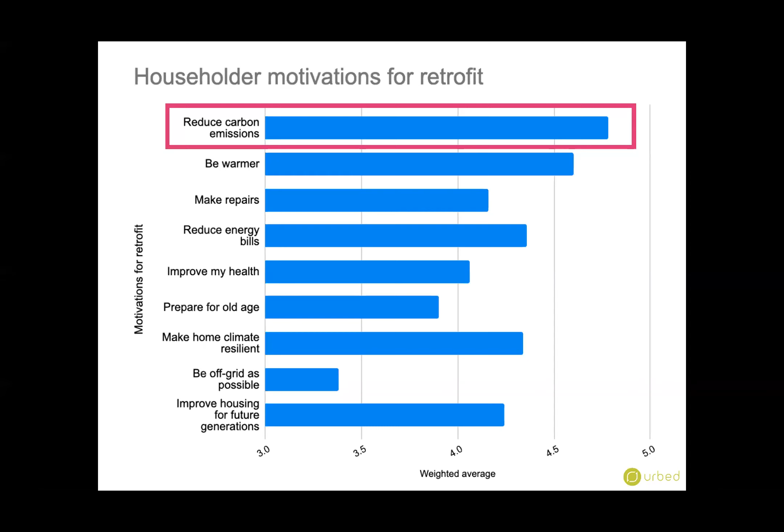Though not all, and it is alongside other things that are important, like comfort and reducing energy bills. But the reason that we're bothered about carbon is because it has a real physical impact on the climate that we are all trying to live in.

If you haven't got your warming stripes yet, there's the web link available there. It's quite a fun thing to do, but obviously the last few years especially, things have been getting a lot warmer, and what we're trying to do is mitigate and reduce the amount of warming that we're going to end up with this century. The main way that we're talking about doing it here is by reducing the carbon emissions from our homes.

There are a lot of different terms that get bandied about. People talk about zero carbon, or even being carbon positive, which is quite ambitious. At the moment, we live in a world in which a lot of the systems we have to deal with, the economic systems, the energy systems, the processes that go into making stuff, all carry some kind of carbon cost. It can be quite confusing how that gets accounted for and where you draw the boundaries, which is something that I think both John and Julie and Lois are all going to talk about.

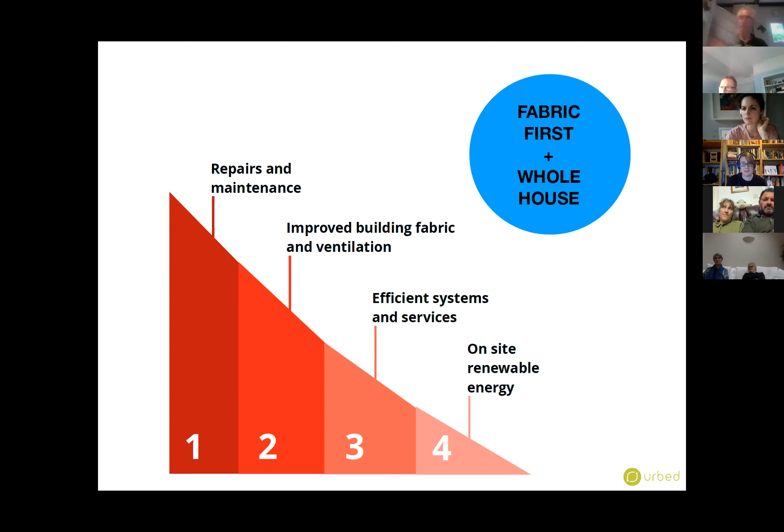That means that we don't always all end up with something approaching passive house, though it might be a step along the way there. When we did the Community Green Deal, the actual design work for it, a lot of it was done in 2013, so this is quite a long time ago now.

And we talked about the target, that being 17 kilograms of CO2 per metre square per year. That came from something that was even a couple of years before that, the Retrofit for the Future programme, because at the time that was what people were saying that we needed to get to achieve that 2050 decarbonisation.

That is kind of tricky, and what we've realised is that counting and targeting carbon in our homes is quite difficult, because we're living in a changing energy system, and that's something John will talk about in a bit more detail in a moment. We've always looked at space heating demand, because that, for most houses, is the biggest use of energy.

And it's also the thing that has an impact on those other things like comfort and health. We're interested in where that should end up and where we need to be to achieve that actual real life zero carbon outcomes, because we talk about it in things like My Home Energy Planner, and when we're doing our strategizing for where we need to get to.

Marianne, do you just want to unpack the concept of space heating demand a little bit? Because it's a term used quite a lot, isn't it?

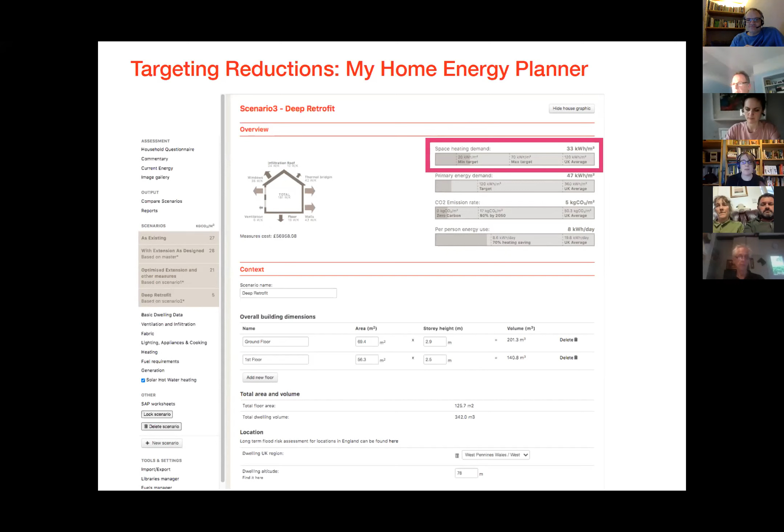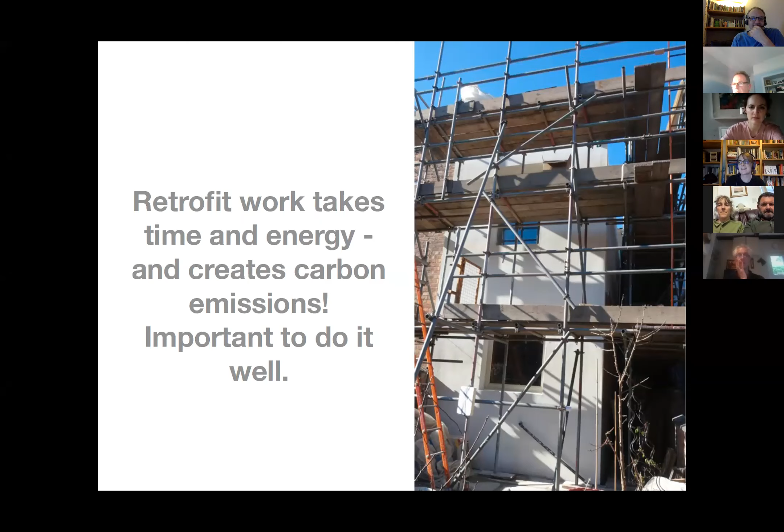The other thing we're really aware of is that you could do a lot of work to retrofit your home, but in doing that work, there's also an energy and carbon penalty. So we want to make sure that when we do that work, we do it well, do it properly, to the level required so it's not wasted. Lois is going to talk more about that side of things and where the balance might sit. And it can get a little bit complicated.

Especially over the last few years, because Carbon Co-op have developed their energy services team, we've always kept in mind that Carbon Co-op has always been a cooperative effort. It's about a group of people doing stuff - you're not just an individual doing things to your home, it's part of a wider effort. Your home is also part of a wider energy system, and how what you do in your home, and what lots of other people do in their homes, impacts that wider energy system.

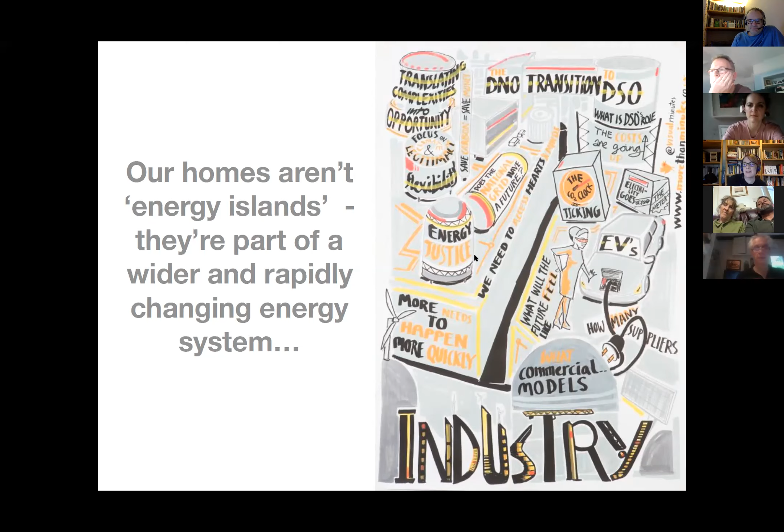And that energy system itself is changing really rapidly. We've got a massively rapidly decarbonising grid. When I started out in this, the no-brainer thing to do was put in a really efficient gas boiler and put PVs on the roof, because the amount of carbon emitted for every kilowatt hour of grid electricity was at least twice what it is now. That has changed, especially over the last couple of years. So that changing context changes maybe what we should think about doing.

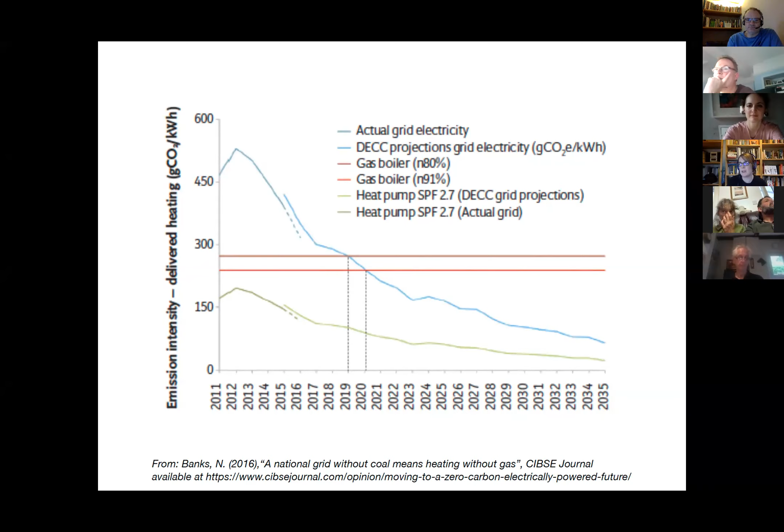So this is how we're trying to think of things: we know we need housing that has lower energy demand, and we know the energy system more widely is hopefully decarbonising even more rapidly over the next decade or so, but eventually hopefully will be zero carbon. You're not actually going to get zero carbon homes until those two things come together, and we need to think of the two things in tandem as well.

So it's what you're doing in your home that has system effects, and then from those system effects, what the target should be for your home. And it gets quite messy.

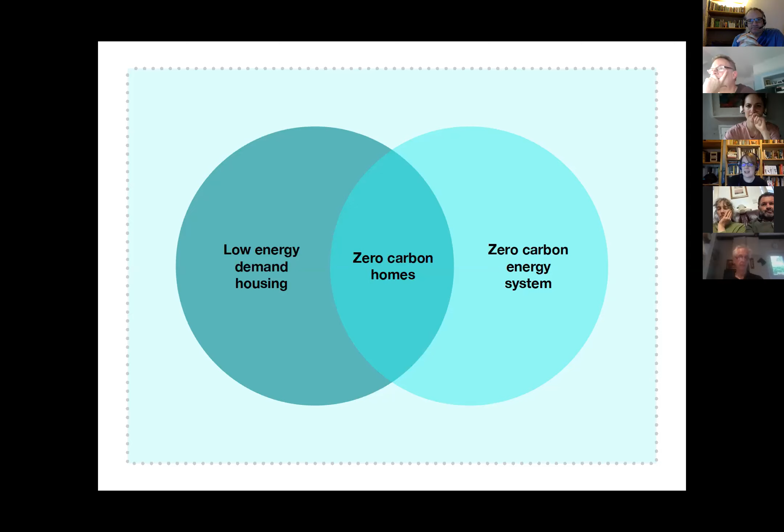That's why we're talking about this, because at the moment we don't live in a set of systems that are zero carbon, and the only way you can potentially get to something like net zero at the moment is probably by offsetting in some way, which has lots of interesting accountancy that can be done around it. But that's why we're talking about what is 'zero carbon ready' - what can you do now in anticipation of wider things around you changing, and what might that mean?

I think the next three presentations are going to go into some of the issues around that in more detail. So that's it from me.

Thanks, Marianne. That's really good, and it's a really good way to set up the debate and discussion there. Because the house is a point of nexus where you have all these different things coming in from different areas - the decarbonisation of the grid, but also the demand on individual houses and reducing that as much as possible.

We're going to hear from Julie now, Julie Godfrey, who works at CIBSE and is also an independent environmental consultant. Julie, John and Lois will pick up different elements of what Marianne's introduced and unpacked. Julie's going to be talking in particular about why heat matters and fabric performance.

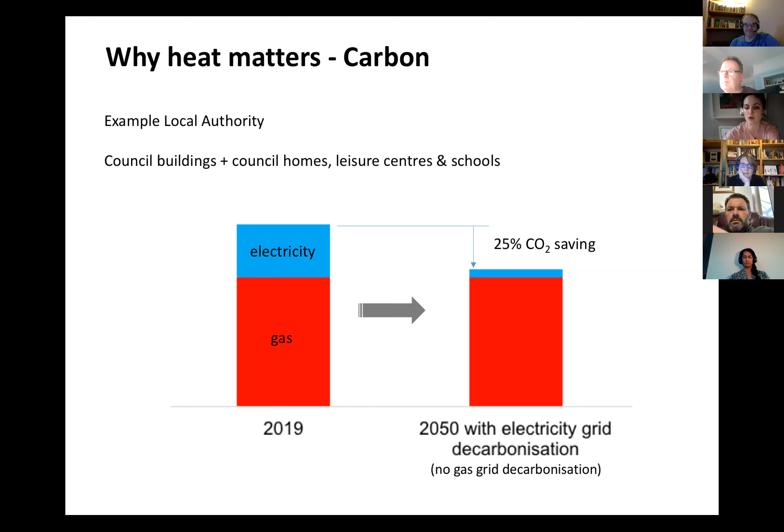So if we just switch from gas to electricity without reducing our demand, we would have problems at the national and/or local level in meeting actual demand. It's not only about how much we consume during the year, but what we need on that one cold winter day.

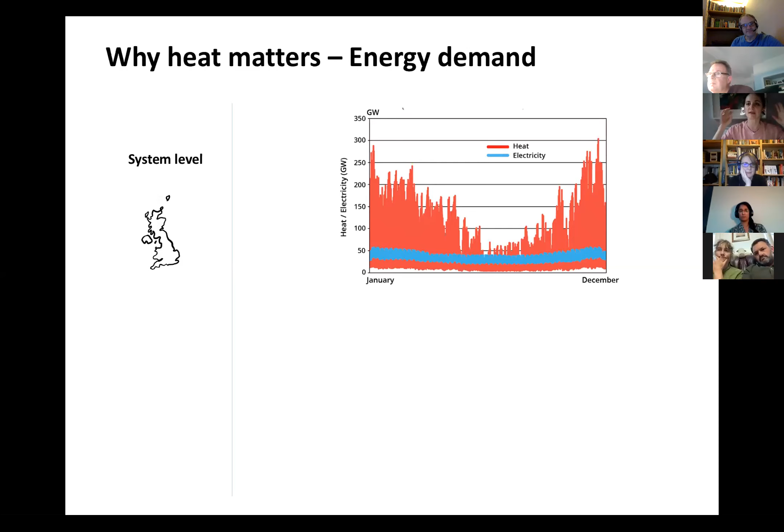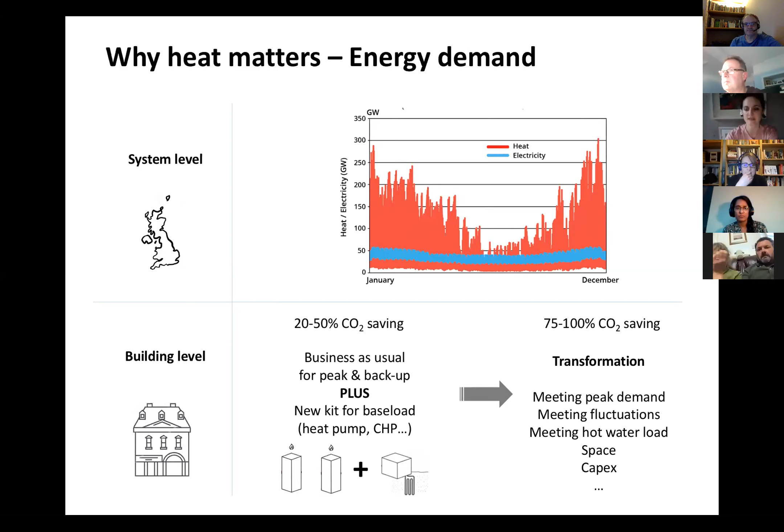At the building level, for us as homeowners, it's also pretty important because we could have a boiler or another piece of kit that meets our demand most of the time, but the size we'd need to keep us warm on that cold day is much higher. A boiler doesn't take much more space and isn't much more expensive for that. But when we look at alternative technologies like heat pumps, they may take much more space and cost much more when we buy them. So it's really important to try to reduce this massive demand for a few days in the year, as much as how much we consume throughout.

A question we often get asked is, with climate change, will heating still matter? The answer is yes. Currently, deaths from heat waves make the headlines, but they're actually much lower, even in a bad heat wave, than excess winter deaths. Now, excess winter deaths also include deaths from flu, so it's difficult to precisely allocate what's due to cold, but it's usually estimated at around 10 or 11,000 a year in England and Wales, which is way higher than even the worst heat wave we've had in England.

The other thing happening is that we're becoming better at managing heat waves - we have warning systems in place, we make sure people aren't alone, have had water, etc. While people in fuel poverty in cold homes really have an issue. Even accounting for climate change, UCL and the Committee on Climate Change estimate that even in the 2080s, yes there will be fewer deaths related to cold, but they would still dwarf those related to heat. So heating will still matter in the UK.

The other thing we often hear is, can retrofit deliver? There's loads of horror stories about what can go wrong - for example, mold, poor ventilation, condensation related to thermal bridging, overheating, deterioration of insulation, and what's called the rebound effect, where you don't actually get energy savings because people put more heating on. Yes, that can happen, but that's why it's important to do retrofit properly, as Marianne said, adopting a whole house approach and sharing lessons as we learn about that type of insulation or setup being dangerous.

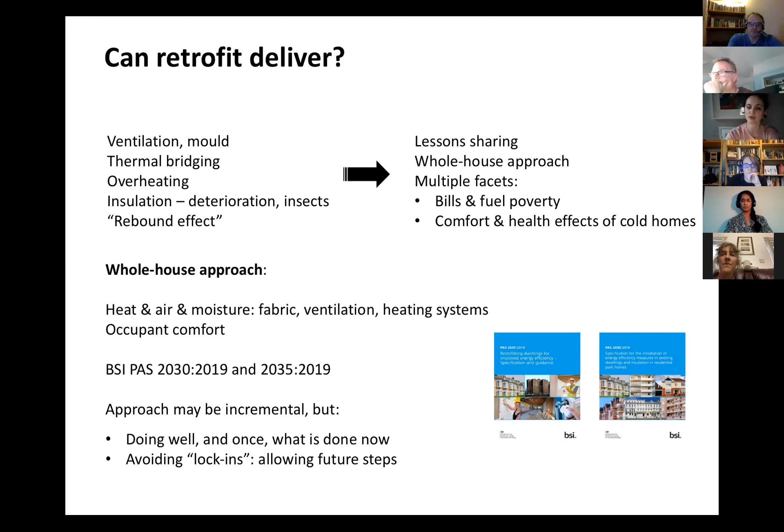The other thing Marianne mentioned is that doing things properly in a retrofit can have loads more benefits than just reducing your energy bill. The image on the left-hand side is my house, a Victorian end terrace, very inefficient.

The picture on the very left-hand side is before I installed secondary glazing. It was taken on winter nights at very similar temperatures, and as you can see, there's been quite a big effect on my windows. I have to say it has improved thermal comfort a bit. I'm not sure it's done a lot to my energy bills, but it's made a lot of difference to noise levels, and that was actually my trigger. The windows are amazing, I'm very glad they've saved carbon, but the trigger, the day I decided to call someone to sort it out, was noise. It also shows I still need to change my door, and that's in the works.

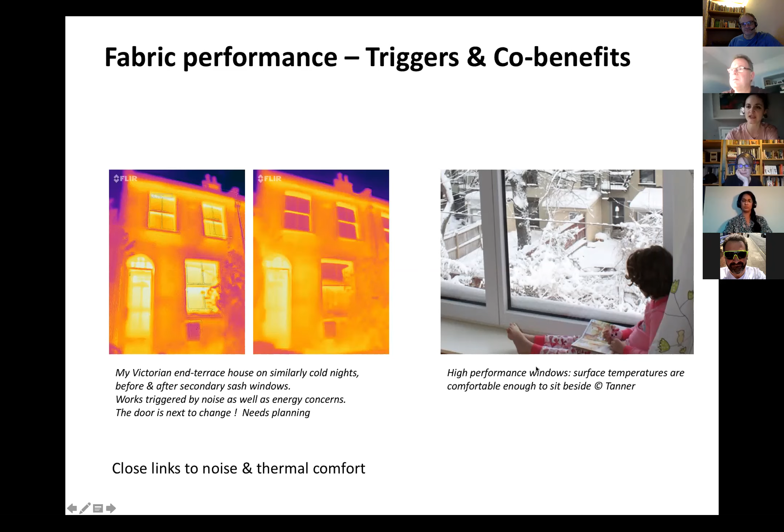Again, that's a nice illustration of how, if you have very good windows, you're generally just comfortable. It's not only about your energy bills, but surfaces are not cold, which improves your comfort overall.

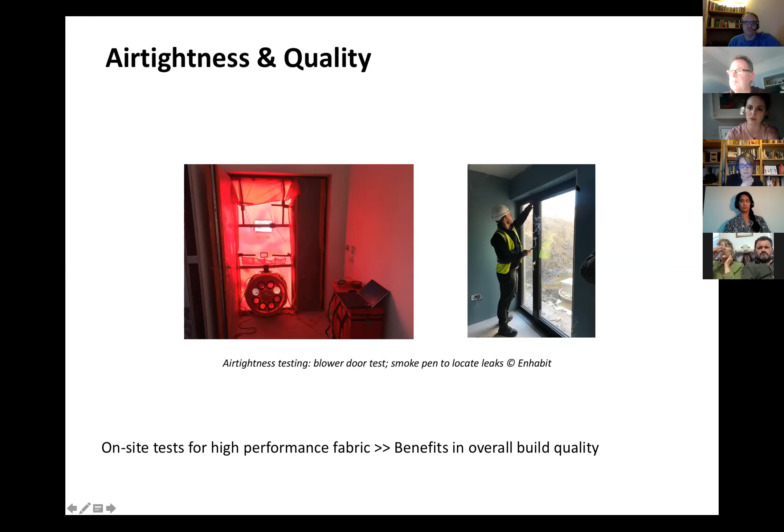The other benefit of doing things properly is that generally when you adopt really ambitious approaches and work with people who know what they're doing, general build quality improves. So it's not only that you save energy and improve energy performance, but many people report an overall better quality of the works. That's particularly true when you look at airtightness, and people who look very much at the detail of how things have been installed on site.

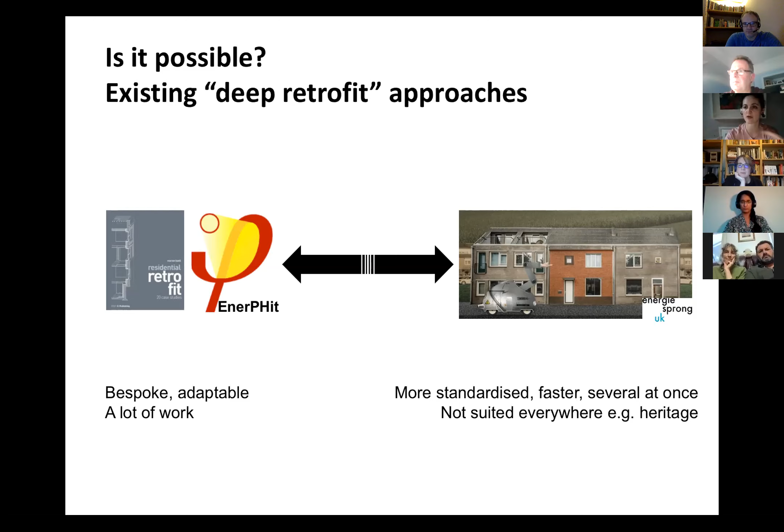It's possible to do that well. There are some examples, and we're starting to see in the UK a range of approaches, from really bespoke, adaptable approaches like EnerPHit and pilot projects, through to methods that are much more replicable, meant to address, for example, rows of terraced houses. None of the approaches is very common yet, but we're starting to see a bit of a range of options available, even if they're not applied a lot at the moment.

Now, if you want to embark on it, this is the less positive half of the presentation, but John will pick up on optimism after me.

Unfortunately, we can't rely on regulations alone. You can't go to an architect and a builder and say, could you please do an energy retrofit of my home, and building regulations in the UK must be great, can you make sure we comply? Regulations are the bare minimum, and they tend to be defined by the lowest common denominator. They were last updated a while ago, so that lowest common denominator doesn't take account of the climate emergency.

I would say there are three weak areas, broadly speaking. One is that the targets and requirements are not good enough and not onerous enough. The second is that meeting the regulations will not ensure you follow the right process and that the works are done properly.

And the third issue is that enforcement can be patchy. Very often on a small project, the local building control will care a lot about fire and structural safety, but they will not pay much attention to everything else, especially energy. And there is no requirement in regulation to check that the house actually performs as it was supposed to, that you now have, for example, 20% or 50% energy savings, whatever your target was.

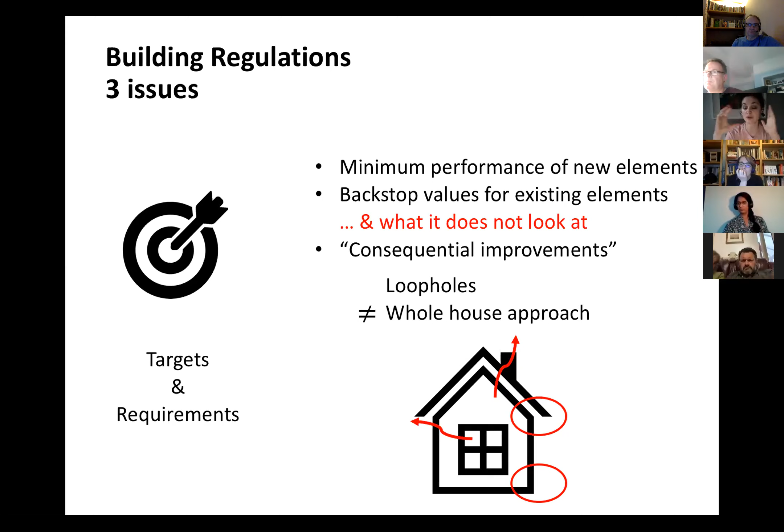Now we're going to take a little break, and there's a poll that should come up with two questions. The first question is: do you know the energy performance certificate, the EPC rating, of your home?

People should be able to see that poll now, but I can't see anyone voting on it. Oh, I can see loads, good. Maybe that's because you're the presenter. Okay, so 55 people have voted and it keeps coming up - 58. Okay, I'm going to finish it now.

All right, so just over half of you, 57%, know the EPC rating. And then the second question is: do you know what it relates to - is it a measure of your home's energy consumption, carbon emissions, energy cost, something else, or are you not sure?

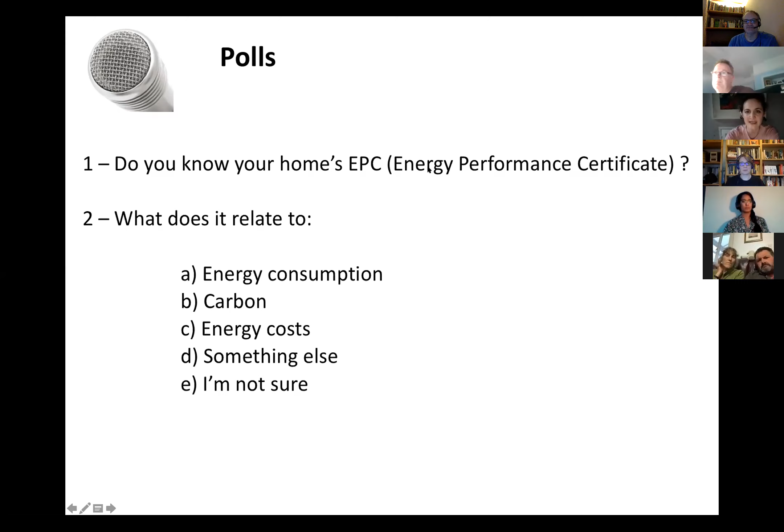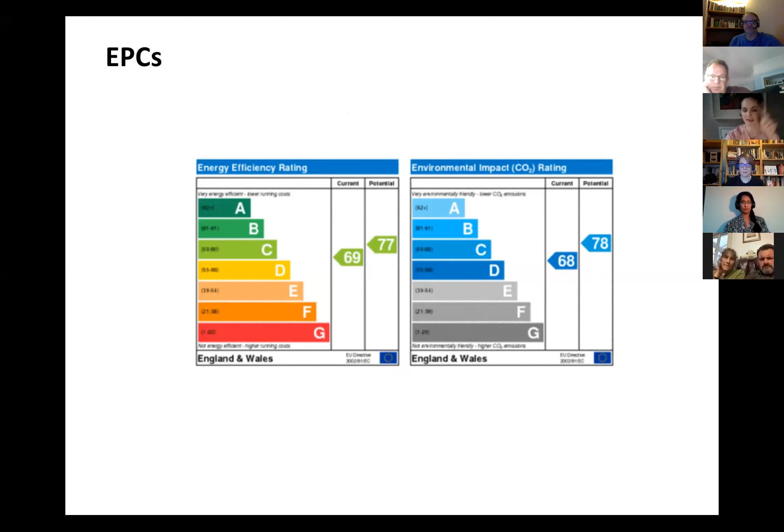So what's the answer? Actually, the EPC has two ratings. It's got what is called on the left the energy efficiency rating, and on the right the environmental impact CO2 rating. In common language, when we say EPC rating, we're relating to the energy efficiency rating. So it's not talking about carbon, it's energy efficiency - except that it's not, because it actually relates to energy costs.

And let me check - 34% of you knew that. A very well-informed audience, but still slightly confusing. Overall, it means we have EPC ratings which relate to energy costs, not energy efficiency or carbon, and building regulations which, as I whizzed through, are patchy to say the least. Do they work?

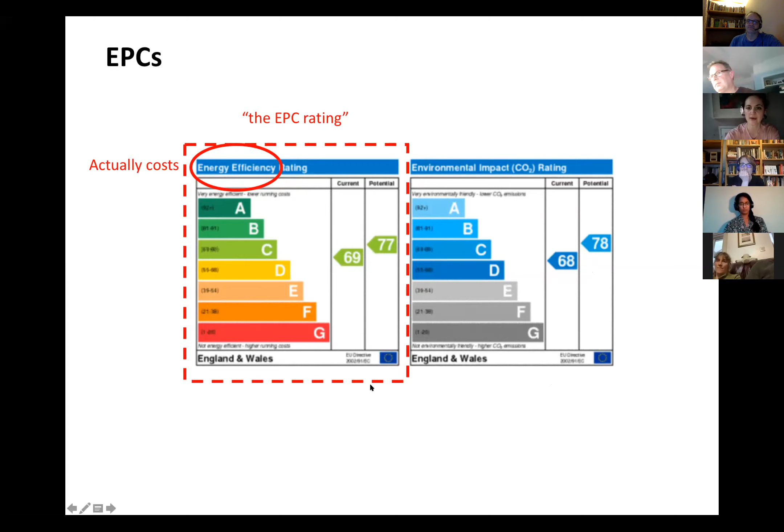The evidence we have, there's no huge scale analysis available yet, but CIBSE should have some in a couple of months based on 100,000 dwellings. At the moment, what we have is a very useful study by Etude, based on 400 dwellings in one local authority.

They looked at the energy consumption of 400 dwellings and classified that according to the EPC rating. Each bar you can see here is the energy consumption of one dwelling. If you can't see a trend, that's normal, because there isn't really one. We can't really say that the buildings with the best EPC rating consume less than the ones with the worst. There seems to be a little bit of a trend on average between D and B, but to be honest, the worst ones, which tend to be older, aren't that bad either.

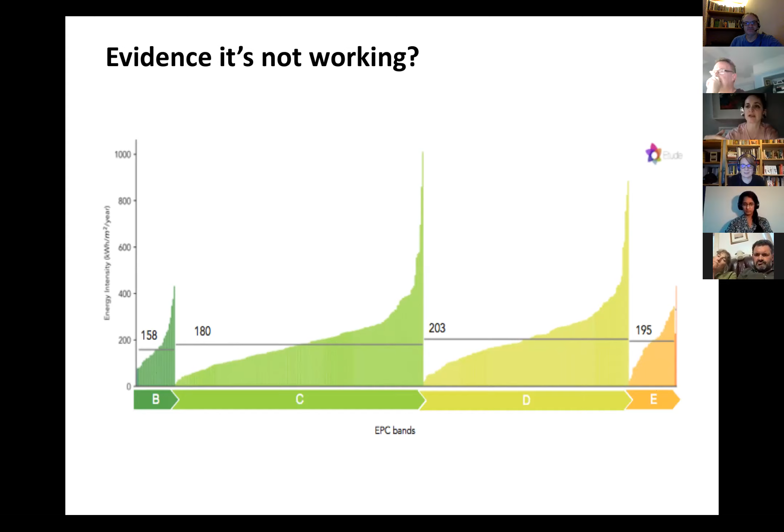So it's just nowhere near enough the level of step change that we want to see when we change building regulations.

Just to finish very quickly, is government about to sort it out through the new grants that were announced, if not through regulations? They announced 2 billion last week, I think it was.

Now, I don't want to sound like money grows on trees, but these £2 billion are not new money. They're a third of what was announced in the manifesto. If you look at the average cost of a deep retrofit, if we were to spend these £2 billion, we would cover between 126 to say 420,000 homes. That's not even a quarter of the households in fuel poverty, let alone a big portion of the total building stock.

We don't know much about how government intend to spend that, but what they're saying is up to £5,000 in vouchers to householders. We don't know the detail. I think there's a danger with vouchers because again, it's not the whole house approach. You could just go buy a bit of insulation, job done, and not realize it's created other issues. What I would advocate is that these vouchers should at least be used to create a low carbon retrofit plan for your home. And that's it.

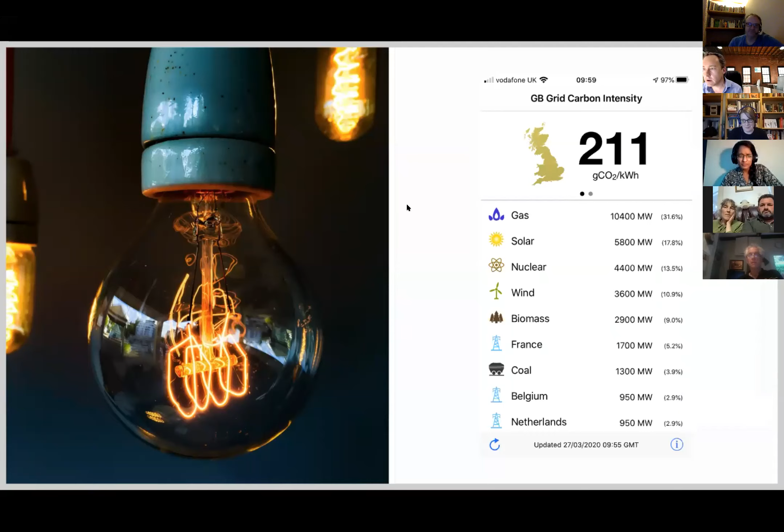But later on that day, when it wasn't as sunny, the grid intensity was a bit higher, so it was a different answer. And next year, or the year after, when the grid intensity has changed, it'll be different again, and different at different times of the day. And whilst, as Marianne and Julie also said, the grid is decarbonising, we don't really know what's going to happen in the future. Are we going to open lots of new offshore wind in the North Sea, or will that be scuppered? Will we have tidal? We don't know, because the government at the moment seems to be betting the farm really on hydrogen, to be perfectly honest. So the grid may not decarbonise at the rate we expect. So it's very difficult to tell.

So if we compare those two, right now in 2020, we know it's somewhere between 150 on a very good renewables day to 298 on a poor renewables day or overnight, that amount of carbon, and the energy is 1 kilowatt hour. In 2050, we've no idea, to be honest, how much carbon is going to be released as a result of that light bulb, but we know that it will still be 1 kilowatt hour.

So therefore, it makes no sense to set performance targets for buildings which are going to be around for the next 30 years in terms of carbon, because we do not know what's going to happen. However, if you set performance targets in terms of energy, then if you build an efficient house now, it'll still be an efficient house in 2050. So that's why the answer, as far as I'm concerned, is definitely energy, not carbon. Not to say we don't keep an eye on carbon - carbon is the end game, it's very important, but performance targets really should start with energy.

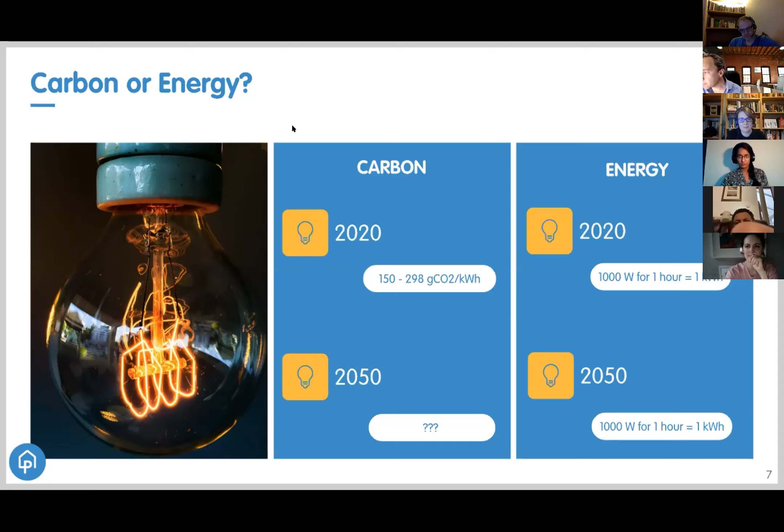So let's move on to what does net zero look like. This is what we might find in a typical new build UK house. The majority there, 86 kilowatt hours per meter squared per year, is heating demand, then hot water, and then lighting. So if we offset all that with generation, so add that up, 112 kilowatt hours per meter squared per year, then that's net zero, isn't it?

People agree that's net zero? Any nods, any shakes? No, people are non-committal.

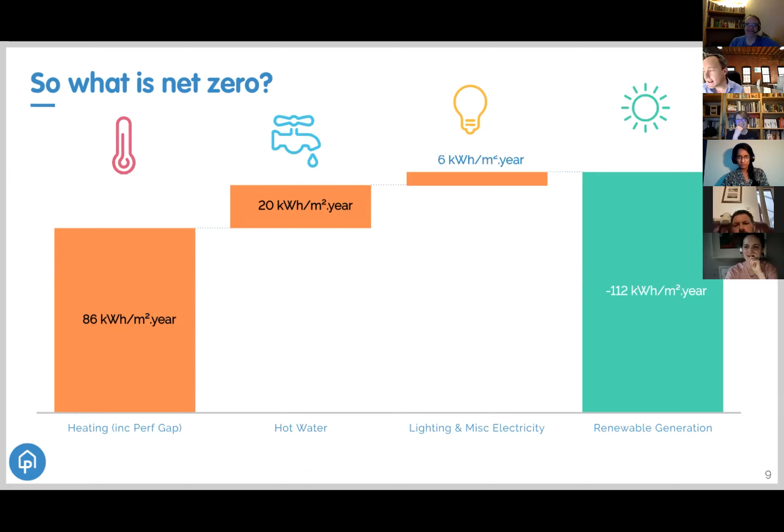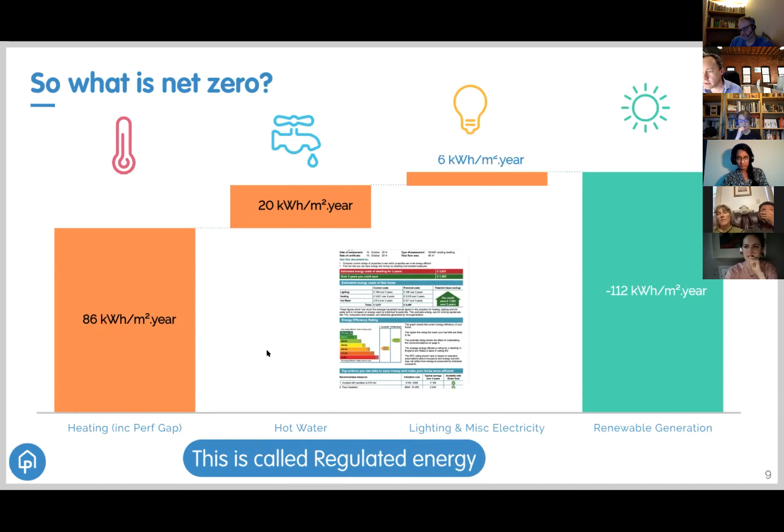So actually, Julie was talking earlier about EPCs. If you did this, your EPC would indeed tell you that you are net zero, because the EPC only deals in regulated energy, and regulated energy is exactly that - it's heating, hot water, and lighting, and a bit of pumps and fans that support your heating system. And the reason that's done that way is, to be perfectly honest, because the other bits are really difficult to predict, and so we don't regulate them. And they are appliance loads, so everything else.

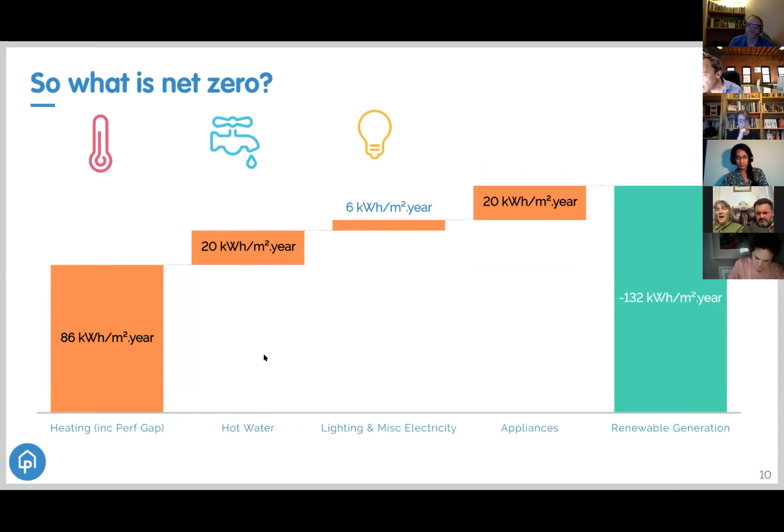So that must now all be included - if we're trying to get to net zero, we can't just ignore things that previously were a bit difficult. We actually need to be serious about this, which means we need to take into account unregulated energy. So is that net zero if we generate enough renewable energy to offset that? Any thoughts on that? People still hovering on the fence?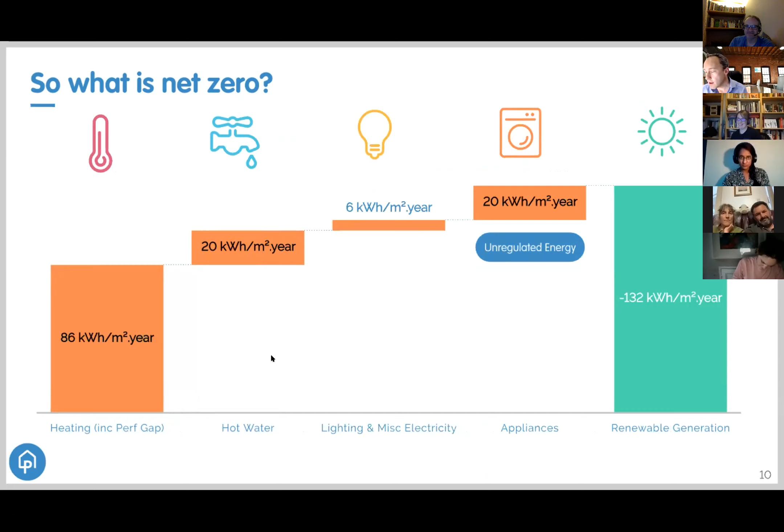So the answer is not quite, to be honest. And the reason is because in the future, are we burning stuff? No, we're not burning stuff. So first rule of net zero, stop burning stuff, in particular stop burning stuff that comes out the ground. So in our future nirvana, which we're kind of moving towards but we're not there yet, we will not be burning stuff to generate our energy, which means everything comes from renewable sources.

But there is a problem with renewables, and the problem is that they don't arrive when we want them to. So at half time on the World Cup final day, when everybody pops off to make a cup of tea, it's not convenient that the wind blows or the sun shines. And that gives us a problem with storage, and the problem with storage is losses. So if we need 100 kilowatt hours to run a house, but we have some storage, then we actually need to generate 120 or 130 kilowatt hours in order to actually power that house, because we lose some of our energy in storage.

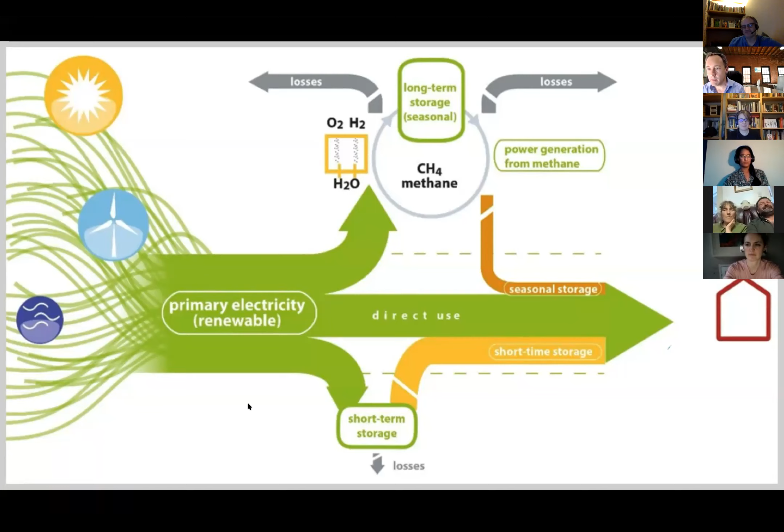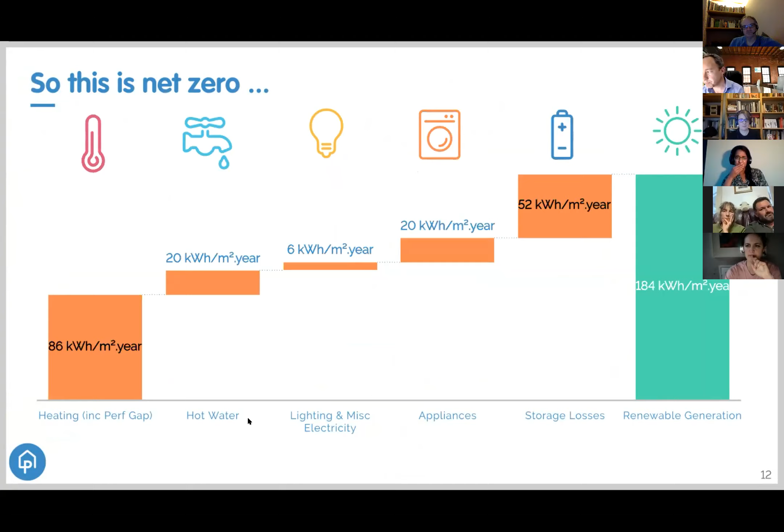The amount we lose in storage depends on the storage type, but critically also depends on the length of time you put things in storage for. So if we're generating renewable energy in summer but need most of it for heating in winter, that will incur significant losses. That means the actual equation for net zero is unregulated plus an allowance for storage losses, because that's the reality of what's going to happen. So that's my definition of net zero.

I'm happy to debate that with people later on the panel. So my next topic is about why we shouldn't be aiming for net zero buildings.

We're going to have another poll at this point. So this is: do you think we should be mandating that all new buildings, accept that existing buildings are a bit difficult, all new buildings should be zero carbon on site? So that building itself should be net zero.

We're up to about 40, 50%... yeah, 75%, so we can close it there. So the winner is no, which is excellent. 43% think we shouldn't, 23% say we should, and 34% say we don't know. So quite a few don't knows.

Let me explain again why I think the answer here is no, which might be a bit surprising. This chart shows the actual energy demand. The colours we had before with the heating, hot water, lighting, unregulated and storage are the same, but we now put them into one bar. I've put it as actual energy demand for a 68 metre squared house rather than per metre squared, and you can see the one far left is a current building regs house with an air source heat pump.

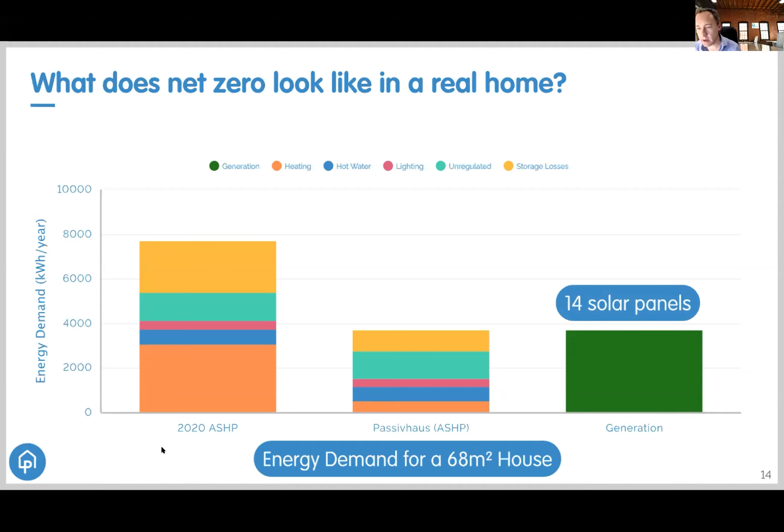Okay, is that a lot of energy? It's a fair amount. How many solar panels do you think we're going to need for that? 14 solar panels for a 68 meter squared house. How big is a 68 meter squared house? Not big, is it? It's probably a 2-bedroom flat.

And actually, what should we be building? Let's look at these two buildings - some of you will be familiar with this concept of form factor. We've got two buildings here: one has 93 meters squared of floor area, the other also has 93 meters squared of floor area, but the top one has 4 times as much heat loss surface area than the one below.

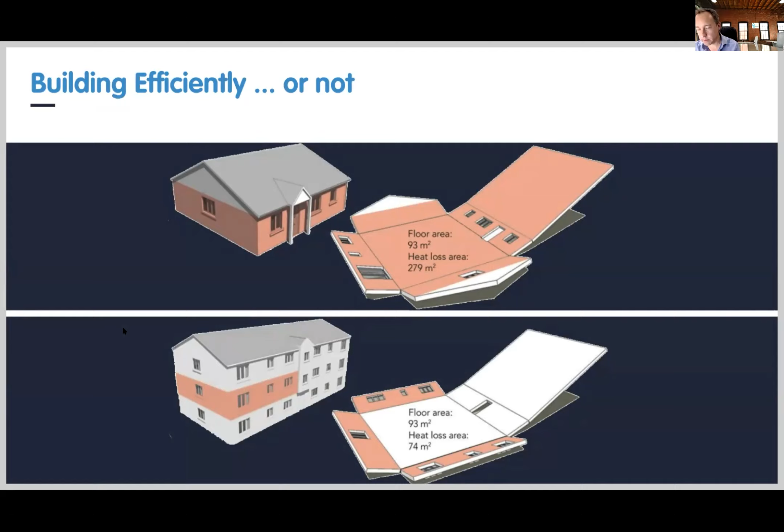So before we even start thinking about U values or walls or insulation, the building at the top is less efficient, and we have to do 4 times as much work to get it to the same level of efficiency as the one at the bottom. Yes, I accept other apartments in the bottom will have heat loss ceilings and floors, but overall, building that kind of efficient shape with multiple units, making best use of our floor area, is going to cost us less and be easier to get to a more efficient building.

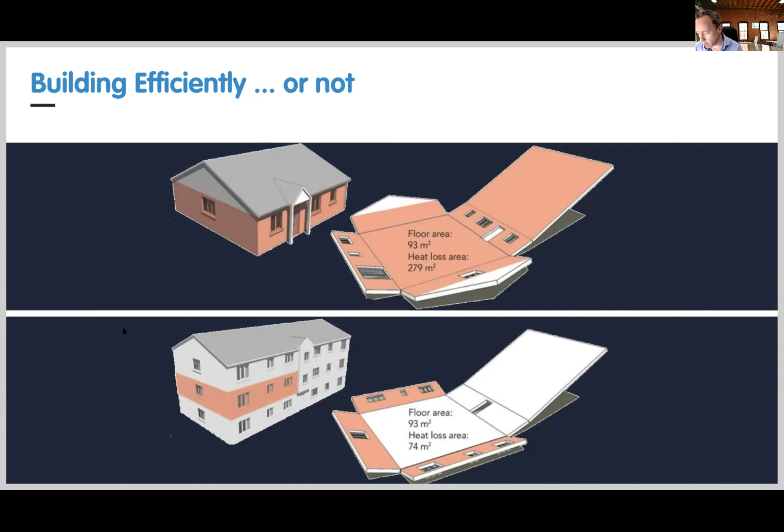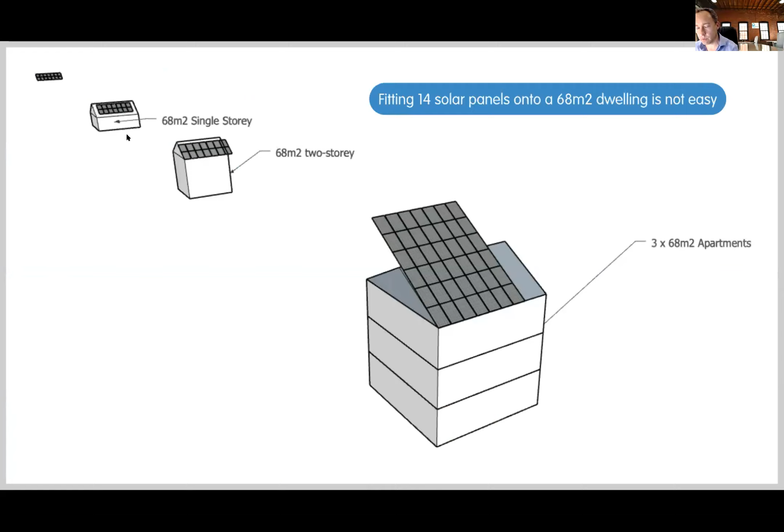So if I go back to my previous slide, what we're trying to do here, if we mandate that every building is net zero, is drive people down the route of building bungalows, which is not an efficient way of using our land or our materials for that matter. So that's not the right answer, but obviously net zero is the right answer.

So actually what we should be doing is looking at the system boundary for net zero - not put it around the house, not really put it around the development. We could put it around regions, towns, but actually we need to be looking at the whole country and maybe even broader, holistically.

We need to be asking how much renewable energy do we need to get to net zero. The way to make that easy for ourselves is to build and retrofit our buildings to be as efficient as possible. That's why if we mandate net zero for individual buildings, we'll drive the wrong sort of behavior and make life much more difficult for ourselves.

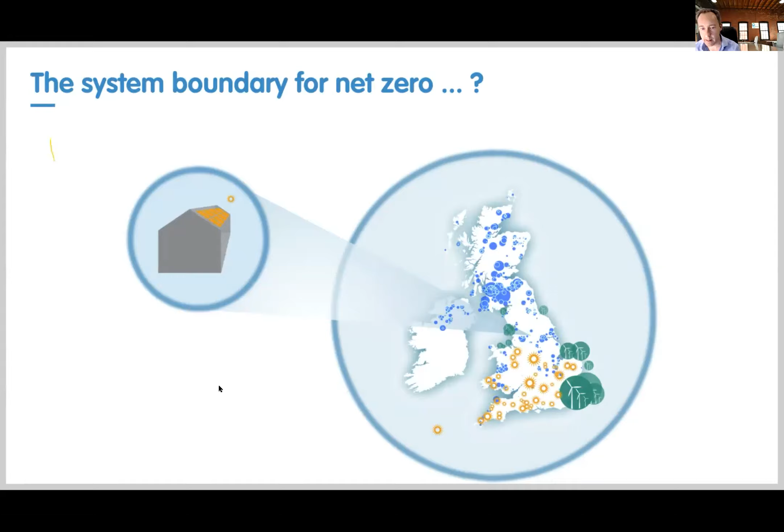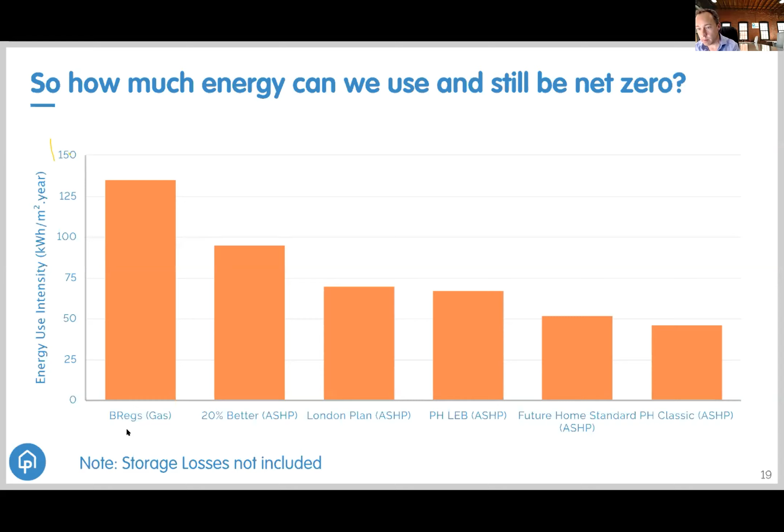So you can see how all those different standards stack up. On the left of the scale is energy use intensity, a term that's been used a lot now, which is the energy at the meter going into the building - everything taken by that building for it to function. That's why I've said storage losses are not included, because they might actually happen in the grid.

So, do we have an infinite amount of renewable energy? Do we have to do this really difficult make-houses-more-efficient retrofit type of thing? What we've done is looked at how much energy we'd need for all our homes in the UK if every home was Passivhaus, worked it out per meter squared, and it comes out at about 45.

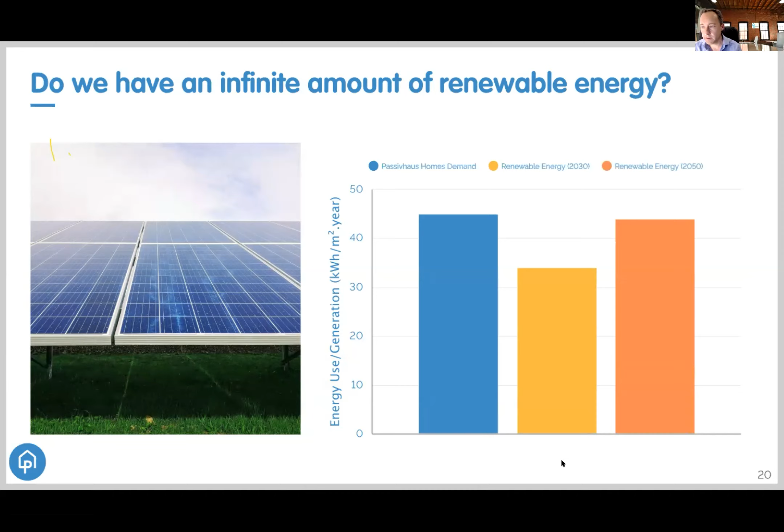We've then looked at the future energy scenarios the National Grid came out with a couple of years ago. They haven't updated the figures since, but in 2018 the figures compared directly were 35 in 2030 and 44 in 2050. So what does that tell you?

That's actually staggering. What that's saying is that if every home in the country was Passivhaus - not just the new ones, but all our existing homes - on current projections we would not have enough renewable energy by either 2030 or 2050 to get to net zero.

Ian's mentioned that his future energy scenarios are updated every year. They are, but interestingly they have not included projections for renewable energy in the last two years, which is quite telling, I think, because if you look at the UK CCC, what they're predicting is demand well over 600 terawatt hours, as opposed to the 400 which was in the future energy scenarios.

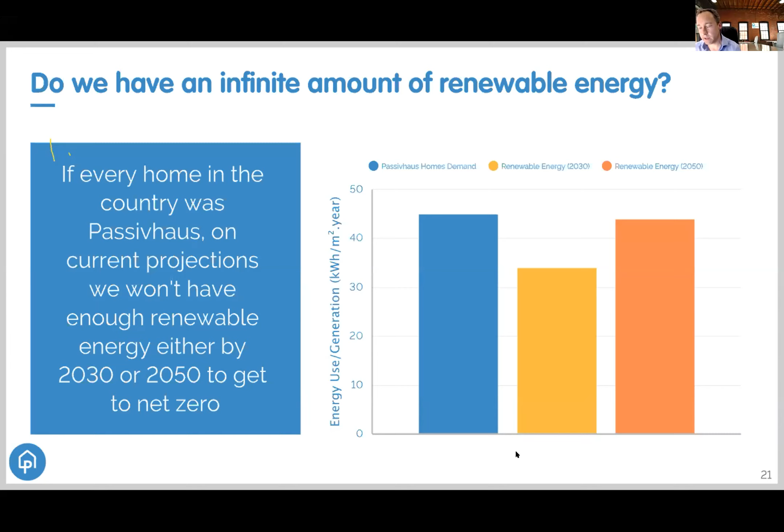So what we're saying is that at the moment we haven't got nearly enough renewable energy to cope with making all our buildings net zero. And of course, that's if every building was Passivhaus - that's not the case. The problem, as ever, and as most of you will be well aware, is retrofit, because most of our buildings that will be around in 2050 are already here. And very sadly, the buildings we are building right now in 2020 will all need to be retrofitted by 2050 because they're not efficient enough.

So that's a massive problem, and it's huge. It frustrates me that I don't think the government have quite grasped the scale of it. If you were running your retrofits sequentially, we'd need to have done one retrofit every 35 seconds from the 1st of January 2020 to the 31st of December 2050.

But that's a bit of a silly metric because we don't do retrofits one after another, we'd do them in parallel. Let's say each retrofit takes 6 months - that means we'd have to be running 500,000 retrofits simultaneously between now and 2050. And let's say they need 4 people per retrofit over 6 months - that means we need 2 million people in the retrofit industry, and currently we've got 135,000.

So the scale of the challenge is absolutely huge. And of course, as Julie mentioned, we've had some encouraging news recently with announcements of funding, but it's actually just a drop in the ocean. There are various estimates on how much energy we would need, how much money we would need to combat climate change, various percentages of GDP.

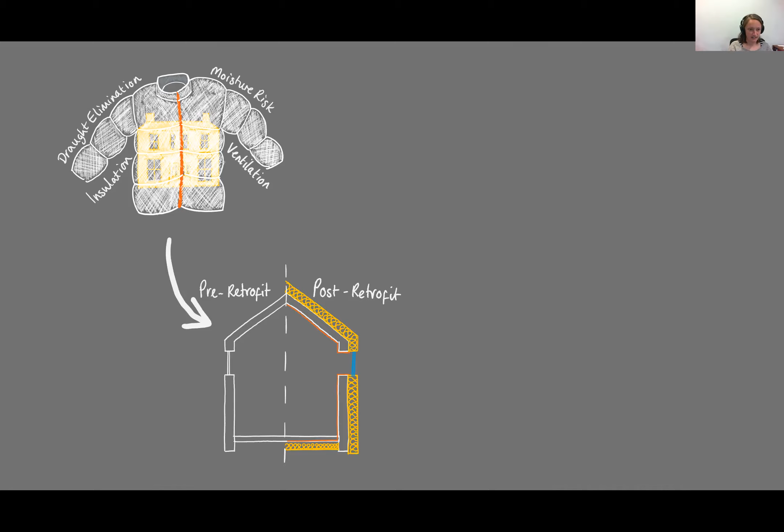So we can think of retrofit as a bit like putting a jacket on your house. It does the two main jobs of insulating, and when we zip it up, there we go, we make it airtight, so this reduces the amount of energy needed for space heating. So this diagram is a little bit more on the technical side, and it shows the insulation and the airtight membrane and the triple glazing and all of those good things that we're probably quite familiar with.

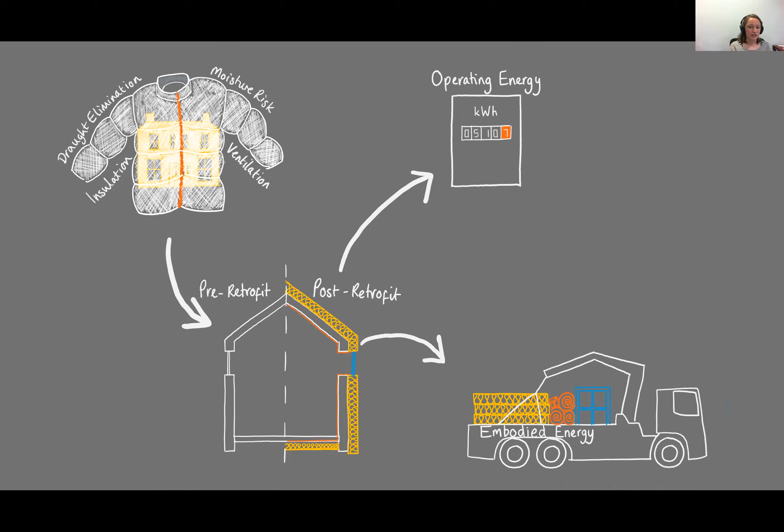So we've already covered this today. The energy that we use for space heating, we call it the operating energy. So that's the gas that we're burning in our boilers or the electricity that we draw from our plug sockets. But we also have to consider the materials that we use in the retrofit. So the jacket that we've put on our house costs us in energy and carbon terms for raw materials, for manufacturing, for transport, and for the installation. And so over the lifetime of the building, the operating energy and the embodied energy can be summed together to calculate what we call the life cycle energy.

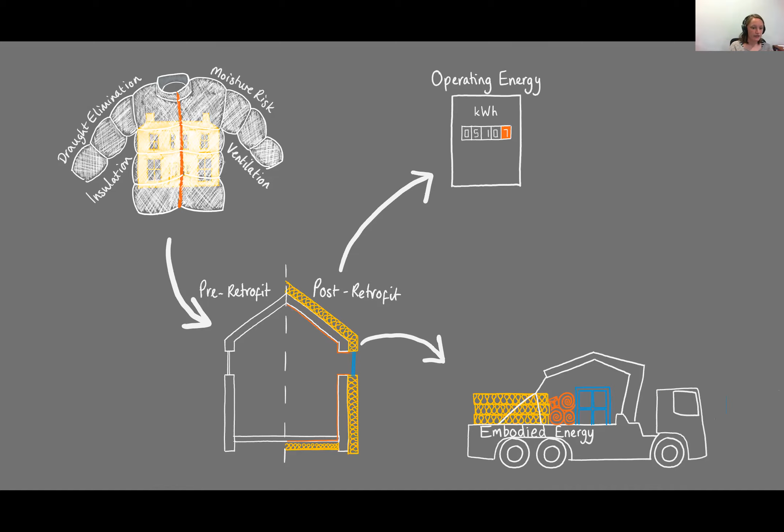In some cases, it's possible that the energy we're actually spending on the retrofit could end up costing us more than the savings we make in operating energy. So whilst we might have warmer homes, it could mean that in energy terms it would be better to have not put that jacket on the house in the first place.

This is where my research is focused: how thick should we make that jacket? Whilst we might expect a thick jacket to have a higher embodied energy than a thinner one, it would also save more in operating energy. But unfortunately, it's not quite as straightforward as that, and we've got lots of other factors to consider.

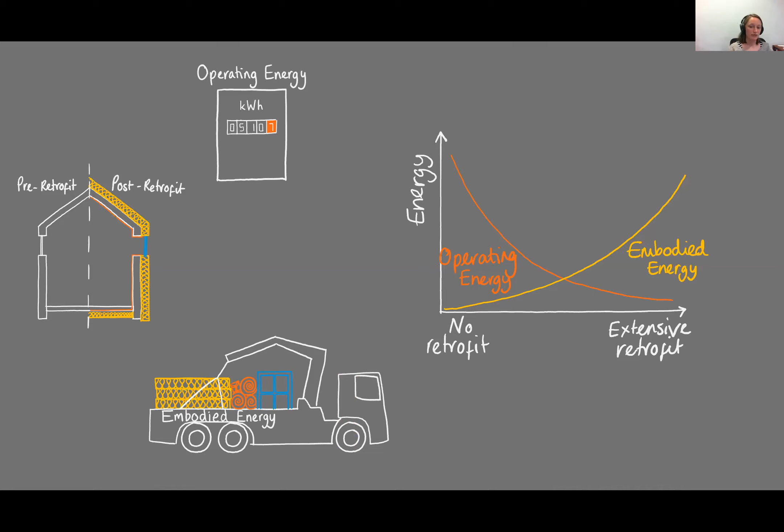We've touched on this already: moisture and ventilation. That means we need more equipment, so we might be putting in an MVHR system, and that pushes the embodied energy even higher. So it's actually a complex series of trade-offs and compromises. What we're wondering is whether there's a position where we can find an optimum point on that curve where we're actually reducing life cycle energy overall. At the moment, we don't actually know where this lies, and this is why it's important that we consider embodied energy in the design considerations of the retrofit.

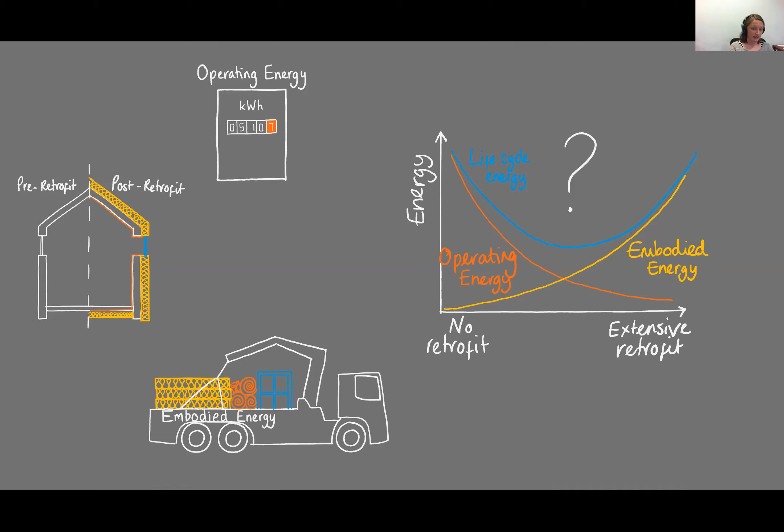We've also got some other things to think about in terms of how we deliver life cycle analysis. This curve, you've just seen my interpretation of it previously - I've actually borrowed this from a paper, Copiello 2017, and it shows a qualitative scale of conventional buildings, low energy buildings, passive house, through to self-sufficient or zero carbon homes. It indicates that this progression shows buildings using less operating energy, but conversely an increase in embodied energy with an upkick as we get to self-sufficient buildings.

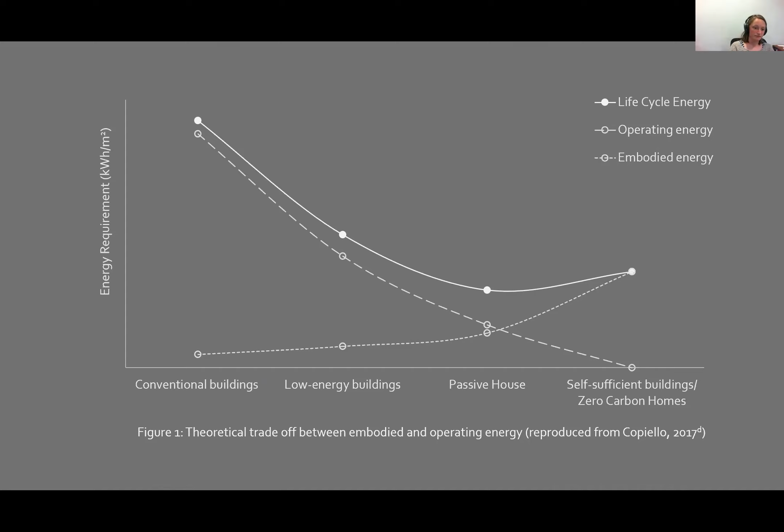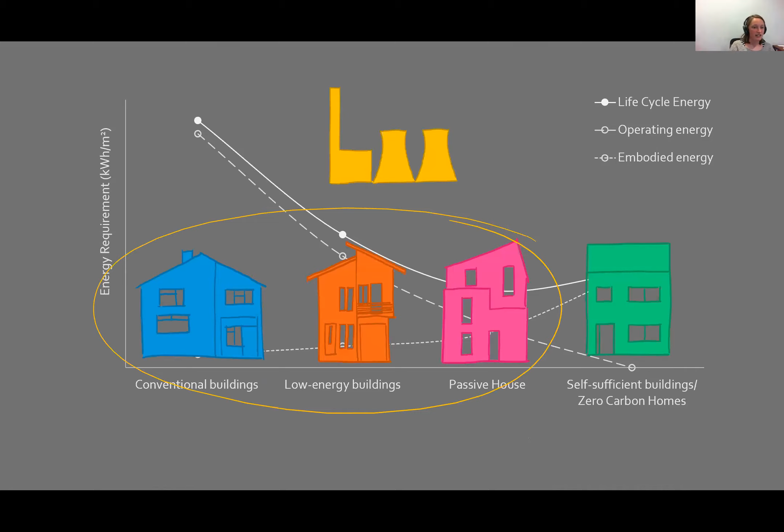So I've drawn some little illustrations here because I like to do things illustratively. What I'm going to highlight is that these first three homes actually have one thing in common: they all have a centralized power supply, which could be renewable or non-renewable. I've drawn a power station of the classic kind because I think it's a good representation of power supply. But when we're doing a life cycle analysis of any of these first three homes, we would not usually include the embodied energy of that power infrastructure.

And yet, when we look to the zero carbon home, which has got its PVs on the roof and maybe a battery inside, we would include that distributed power equipment in our life cycle analysis. So here we're comparing different system boundaries, and the question is: is this actually fair? There are a series of other questions when it comes to life cycle analysis that I would potentially draw attention to.

For example, is it fair to offset the renewable energy from the operating energy figure? You might have heard of terms like cradle to gate or cradle to grave - these terms refer to the spatial and temporal extent that we conduct the life cycle analysis at. Cradle to gate would be that we look at only the impacts up until when that building was occupied, but cradle to grave would look at the impact throughout its life cycle, including the demolition at the end, and perhaps then turning those materials into new building materials for their next lifetime.

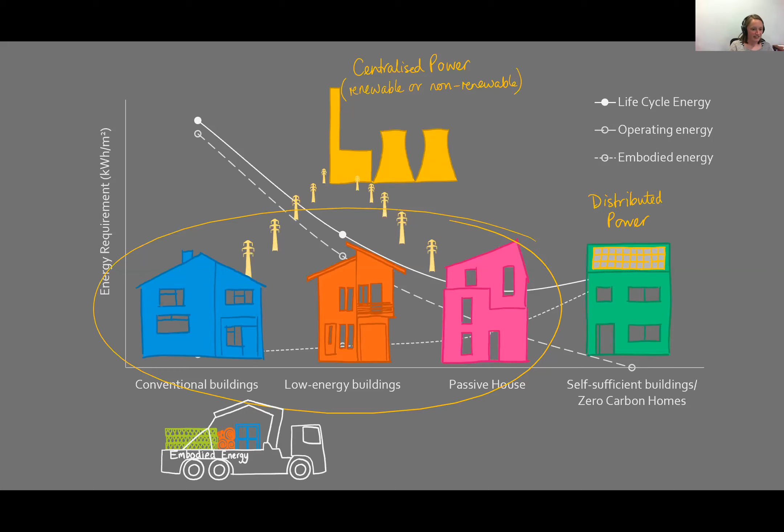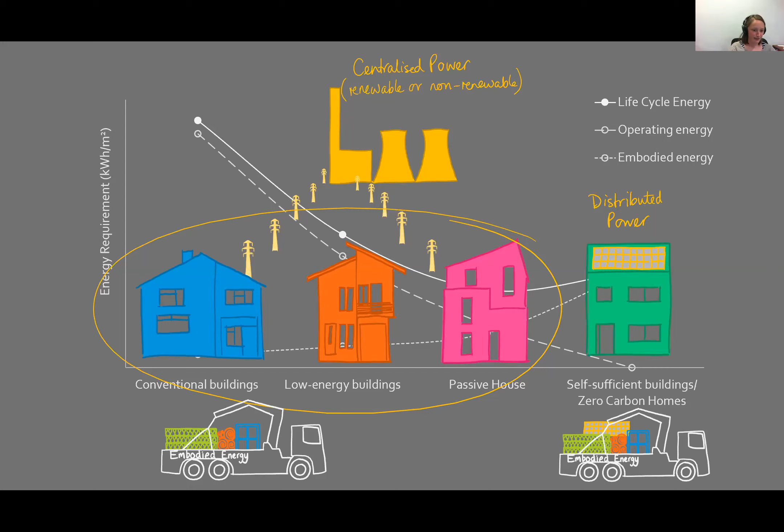And then again, what's the lifespan going to be? Are we in a position to give a realistic estimate of what the lifespan of our building is going to be after it's retrofitted? Is it going to be 30 years? Is it going to be 100 years? Who actually knows the answer? So I've drawn some more animations here - here's my embodied energy of the conventional and low energy passive buildings without the solar panels, embodied energy with the solar panels on there. So anyway, what we know from all of these questions is that life cycle analysis is incredibly complex.

If we've got different analysts choosing different answers to all of those questions I've just asked, we end up trying to compare apples and oranges. It means that the results of one analysis and another are not really comparable. That might lead us to ask what's the value of conducting that life cycle analysis in the first place. Of course, if we had a standardized methodology, the data would be comparable, and we could exploit that data as a tool to drive down life cycle energy. But at the moment we're just not there, so we're in a bit of a pickle with that.

So I'm just going to put this into context for you with a quick look at some data. This graph shows literature data, which I have aggregated from a number of different papers. We've got operating energy along the axis at the bottom, in reverse order, comparable to the graph I was showing previously, with conventional buildings on the left through to self-sufficient on the right. We've got energy use up the y-axis, and the coloured lines show the embodied energy. This is of new builds and retrofits.

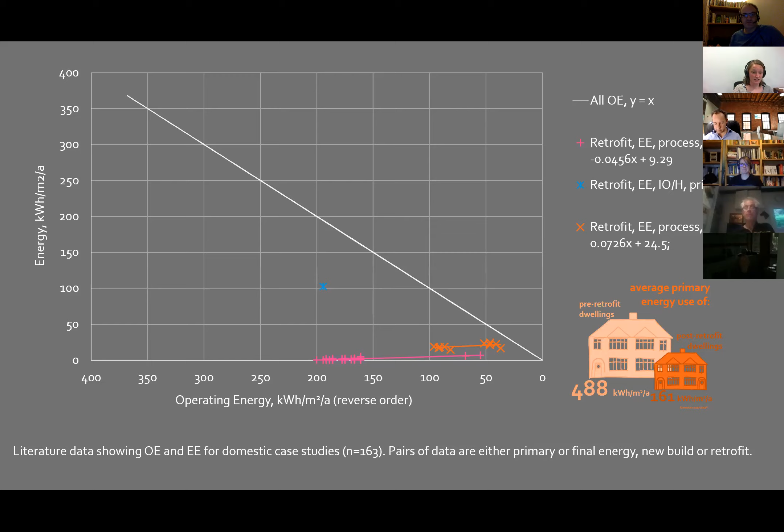Yeah, I think this is reassuring. It shows that we need to be retrofitting to reduce operating energy without too much concern about the embodied energy, but we do need to keep embodied energy in mind, and we certainly need to standardise how we're delivering embodied energy calculations. So thank you very much.